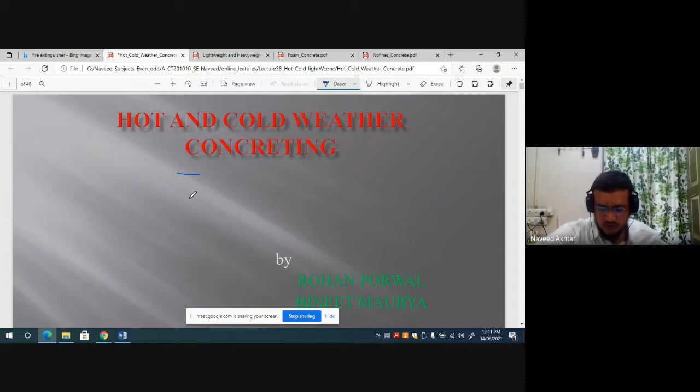Today we will see hot and cold weather concreting. Also lightweight concreting and its different types - foam concrete, no-fine concrete, etc. So we already finished our 4.5 units before the internal examination.

Now we will see the special types of concretes. In that we'll see the lightweight concrete, etc. So here, first of all, we will go through the hot and cold weather concreting.

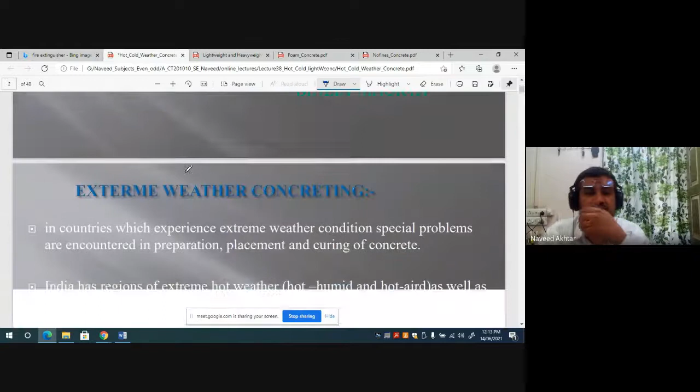Extreme weather concreting is too hot or too cold, when the temperature is beyond the exceeding limits, maybe in the colder region or in the hotter region. So these are called extreme weather conditions.

India has a region of extreme hot weather - hot humid and hot arid - as well as cold weather conditions. Different weather conditions are in India, you can see and experience. In Kashmir, the upper part of the Himalayan region, you will find colder regions sometimes, and Gujarat and below, the southern part, you can see hotter regions. They experience extreme weather conditions.

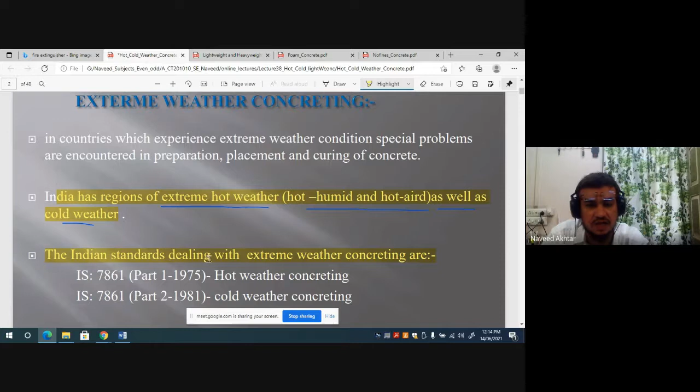IS 7861 Part 1, 1975 deals with hot weather concreting, and IS 7861 Part 2, 1981 deals with cold weather concreting. So there are two major extreme weather conditions - it may be hot weather concreting or it may be cold weather concreting.

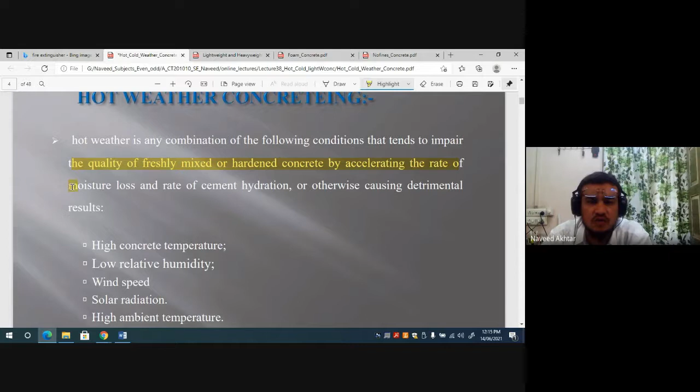In case of hot weather concreting, hot weather is any combination of the following conditions that tend to impair the quality of freshly mixed or hardened concrete by accelerating the rate of moisture loss and rate of cement hydration, or otherwise causing detrimental results. So definitely if the hot weather condition is there, then the moisture loss from the concrete is too high. High temperature is present in this region.

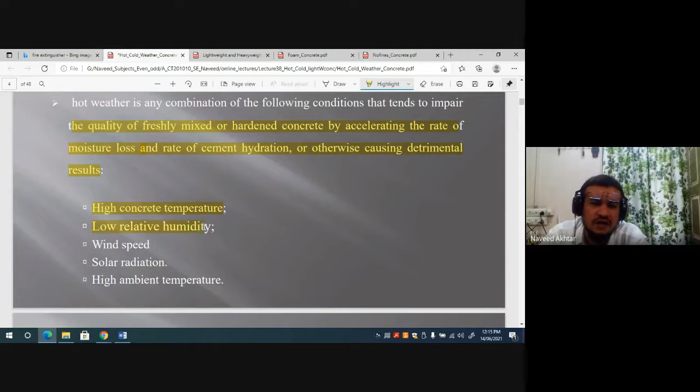Low relative humidity, wind speeds are also high. Solar radiation absorbs the moisture, and there is high ambient temperature. So what difficulty will you face in hot weather concrete? Because the loss of moisture from the concrete is very fast, we can feel increased water demand.

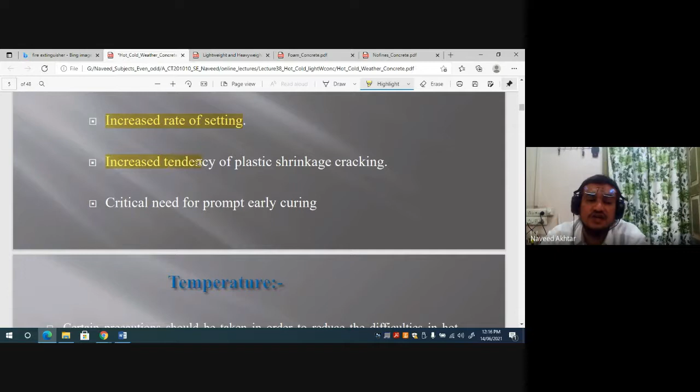Accelerated slump loss - slump loss will also be very high for you. Increased rate of setting - the rate of setting will increase, early set will happen for your mortar or concrete. Increased tendency of plastic shrinkage cracking due to the hot weather condition, and critical need for prompt curing.

So certain precautions should be taken in order to reduce the difficulty in hot weather conditions. Temperature ranging from 10 to 15 degrees Celsius is desirable, but such temperatures are not always practical. So many specifications require that the concrete should have a temperature of less than 29 to 32 degrees Celsius.

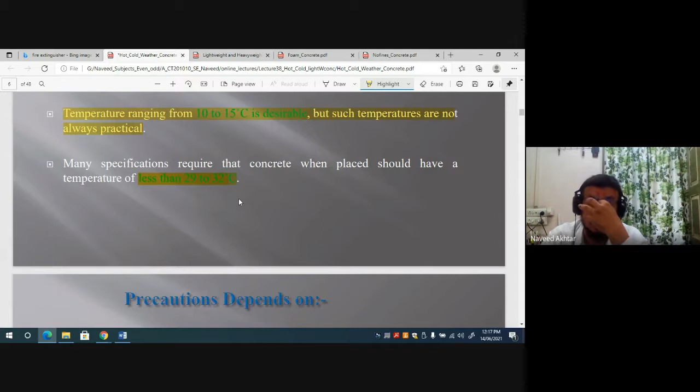So it is the condition where you have to place the concrete. When you are placing the concrete, the temperature outside or inside should not be more than 32 degrees Celsius. Otherwise, it will hamper the properties of concrete. So these come under hot weather concrete.

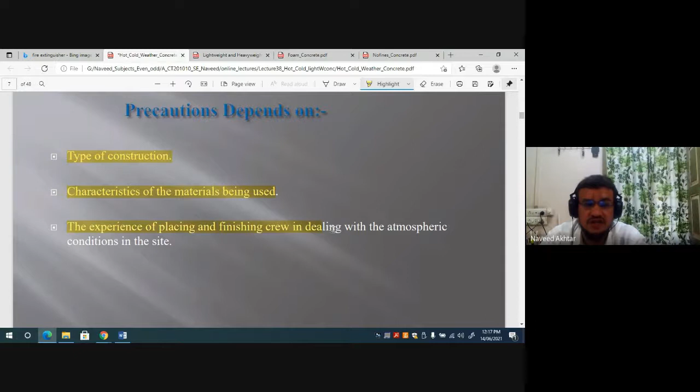Precautions depend on the types of construction you undertake, characteristics of the material being used, and the experience of the placing and finishing crew dealing with the adverse condition site. What precautions to use: the material mix proportion should have a good record in hot weather conditions.

Definitely you have to do mix proportioning specially in hot weather conditions, or maybe sometimes you have to use a retarder to reduce the setting time or delay the setting time in those conditions. Cool the concrete or one or more of its ingredients - I mean, use ice also. Sometimes ice is used.

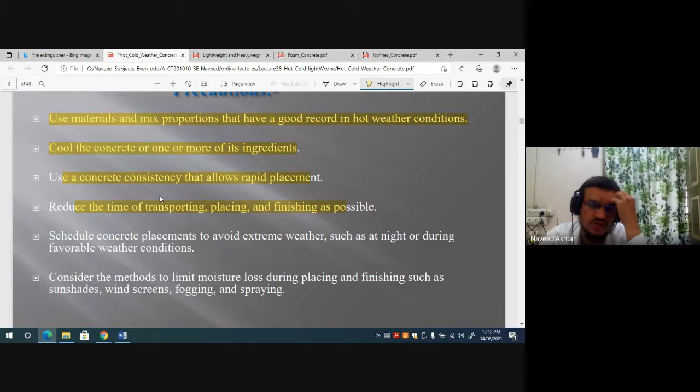Use a concrete consistency that allows rapid placement. Reduce the time of transportation, placing and finishing as much as possible. So the sooner you place the concrete, the sooner you vibrate and finish the concrete, that will be helpful.

Schedule concrete placement to avoid extreme weather, such as at night or during favorable weather conditions.

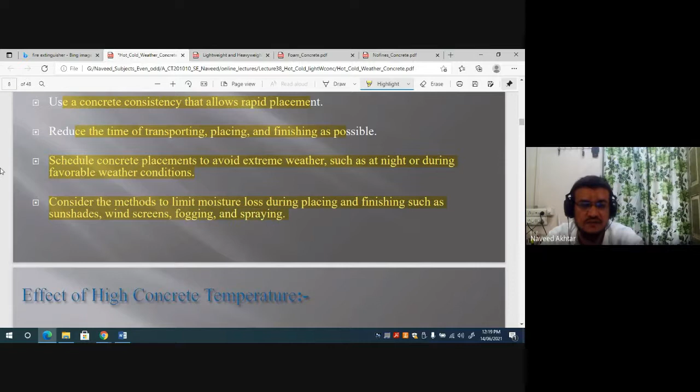अगर ऐसा हॉट रीजन है तो आप रात में कंक्रीटिंग करिए and consider the method of limiting moisture loss during the placing. Finish such as sunshades, wind screen, fogging, spraying. कंक्रीट जैसे खत्म होता है आप इसे polythene bag या other material से cover करेंगे so that it prevents dampness and moisture loss. फिर shed बनाइए, wind screening कीजिए या fogging कीजिए या spraying कीजिए over the surface to avoid the moisture loss from the concrete in hot weather concrete.

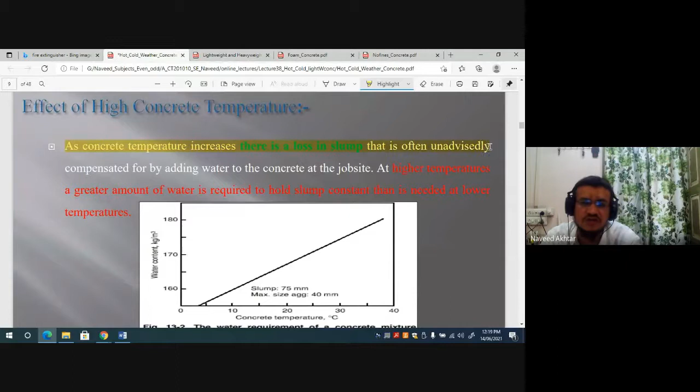So what is the effect of high temperature? As the concrete temperature increases, there is always loss in slump that is often unadvisedly compensated by adding water to concrete at the job site. लेकिन अगर हम ज़्यादा वाटर ऐड करेंगे तो वाटर सीमेंट रेशो बढ़ जाएगा and that will hamper the concrete strength.

So at higher temperature, greater amount of water is required to hold the slump constant, than is needed at lower temperature - lower temperature में वो नहीं चाहिए. तो आप देखिए कि water content आपके concrete slump 75 और maximum अगर 40mm रहे so that you can maintain and get the right values for the different temperature.

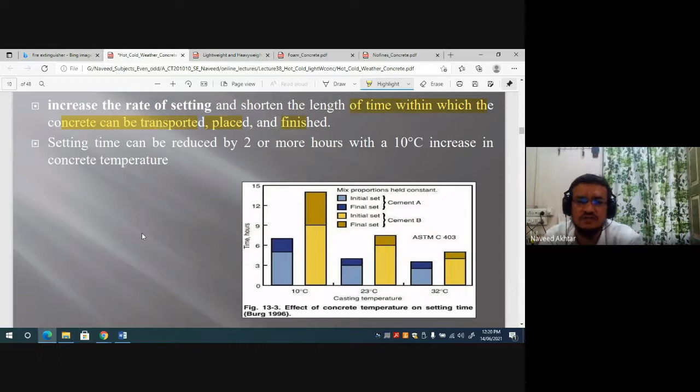Increase the rate of setting, shorten the length of time within which the concrete can be transported, placed and finished. टाइम को कम करना पड़ेगा, जल्दी फिनिश करना पड़ेगा, जल्दी प्लेस करना पड़ेगा, then only you will get the proper result.

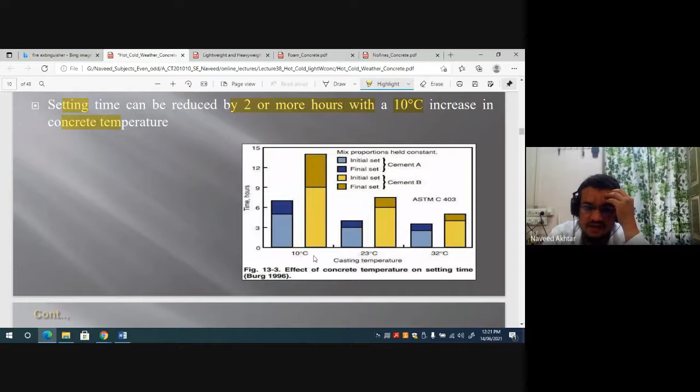Setting time can be reduced by 2 or more hours with 10 degrees Celsius increase in the concrete temperature. अगर 10 डिग्री आपका बढ़ता है कंक्रीट टेम्परेचर का तो सेटिंग टाइम आपको 2 घंटा रिड्यूस करना पड़ेगा. यहाँ पर एक ग्राफ आप देख रहे हैं 10 डिग्री सेल्सियस and the time in hours - the setting time will be reduced, you can see here.

You can see here, the setting time can be reduced. Final set, initial set, final set, initial set - these are at the different temperatures. The setting time is decreasing as the temperature increases. So that is the effect of concrete temperature on setting time in hot weather.

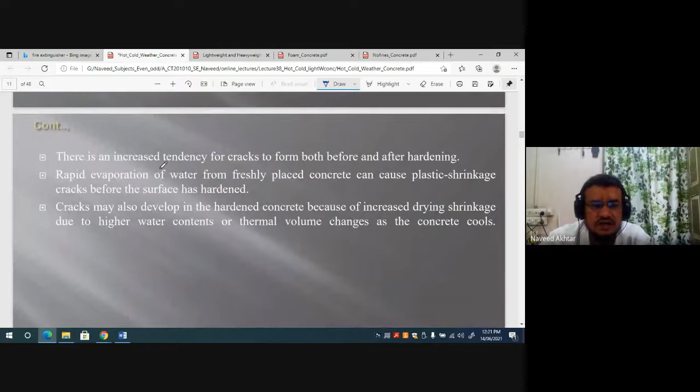There is an increased tendency of cracks to form. Rapid evaporation of water from freshly placed concrete can cause plastic shrinkage cracks before the surface has hardened. Cracks may also develop in the hardened concrete because of increased drying shrinkage due to higher water content or thermal volume changes.

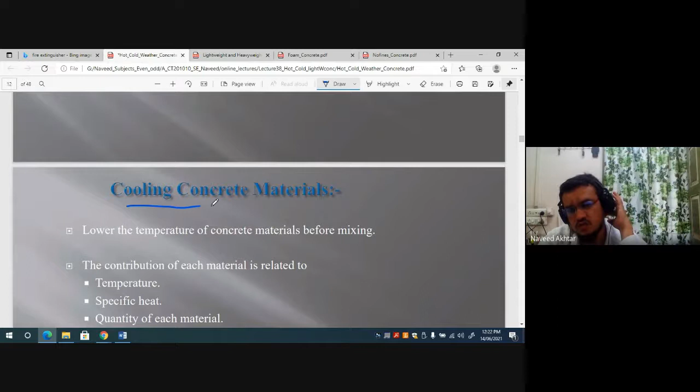Now, opposite to this is nothing but cooling concrete materials. So you can use this to avoid the increase of temperature or moisture loss - you can use cooling concrete materials. Lower the temperature of concrete material before mixing. The contribution of each material is related to the temperature, the specific heat, and the quantity of each material.

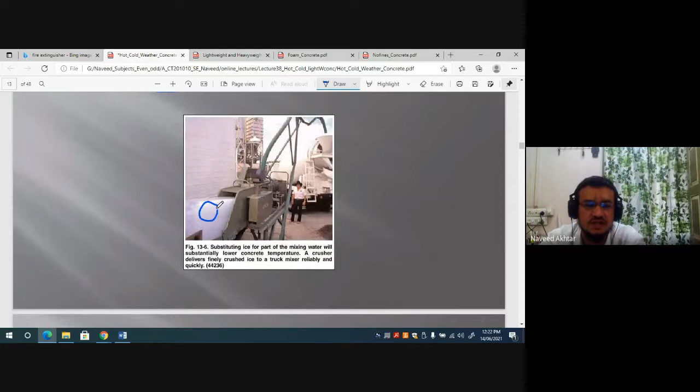जैसे कि मैंने बताया कि ice आप यूज़ कर सकते हैं, adding ice for substituting the water - water की जगह आप ice यूज़ करें कंक्रीट में, you can see your ice, you can introduce it and that can control the temperature. It is helpful for controlling purposes.

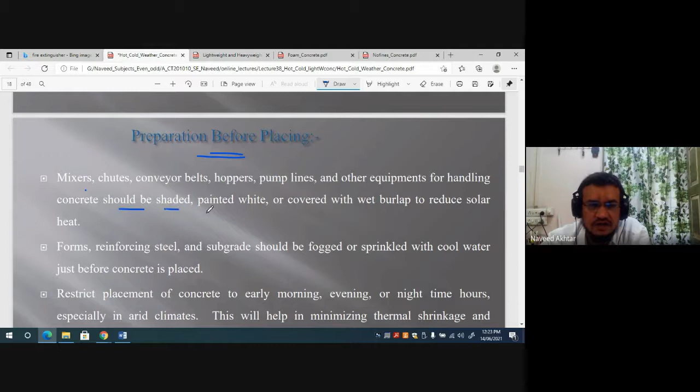Reduce the impact of the hot weather. And preparation before the placing - you should prepare before the placing: mixers, chutes, conveyor belts, hoppers, and pump lines. Other equipment for handling the concrete should be shaded, painted white, and covered with wet burlap to reduce the solar heat. Forms and reinforcing steel and subgrade should be fogged or sprinkled with cool water just before concreting is placed so that the temperature of the surfaces is restricted or maintained.

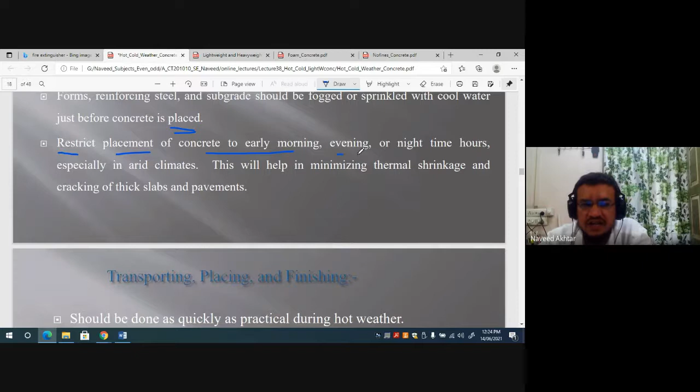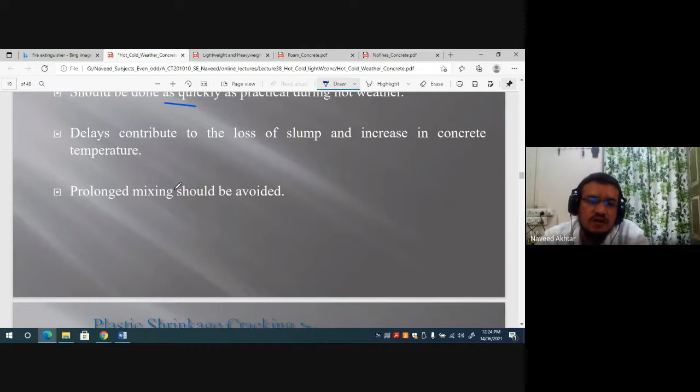Restrict the placement of concrete to early morning, evening or night time hours, especially in arid climates. This will help in minimizing the thermal shrinkage and cracking of thick slabs or pavement. Transporting, placing and finishing should be done as quickly as practicable during hot weather. Delay contributes to the loss of slump and increase in the concrete temperature. Prolonged mixing should be avoided.

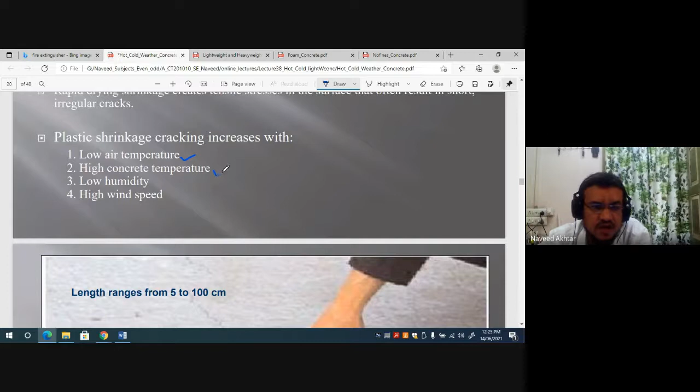Plastic shrinkage cracking in hot weather concreting. It can occur anytime ambient conditions produce rapid evaporation of moisture from the concrete surface, leading to surface cracks. These cracks occur when water evaporates from the surface faster than it can rise during the bleeding process, due to the more temperature.

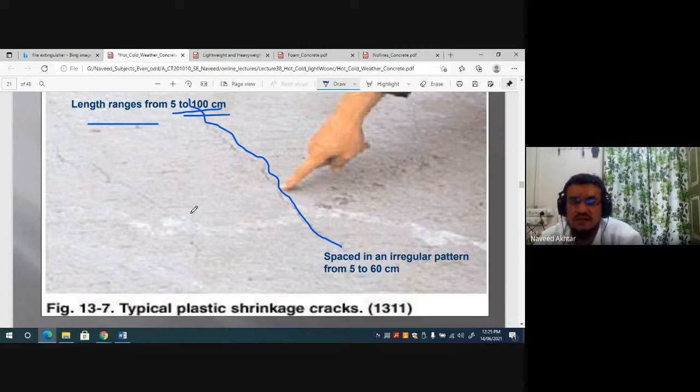Plastic shrinkage cracking increases with low air temperature, high concrete temperature, low humidity, and high wind speed. These cracks have a total length coverage from 5 to 100 centimeters, spaced along the surface in an irregular pattern, more than 5 centimeters apart, from 5 to 60 cm of these cracks. These are plastic shrinkage cracks.

Moist precautions to minimize plastic shrinkage cracks: moisten the concrete aggregate that is dry and absorbent beforehand so that its temperature is maintained. Keep the concrete temperature low by cooling the aggregate and mixing water.

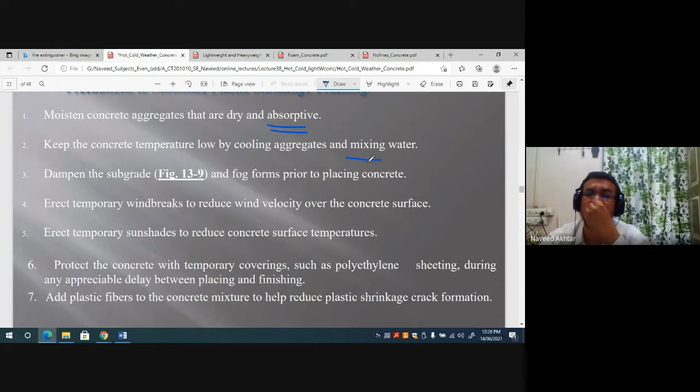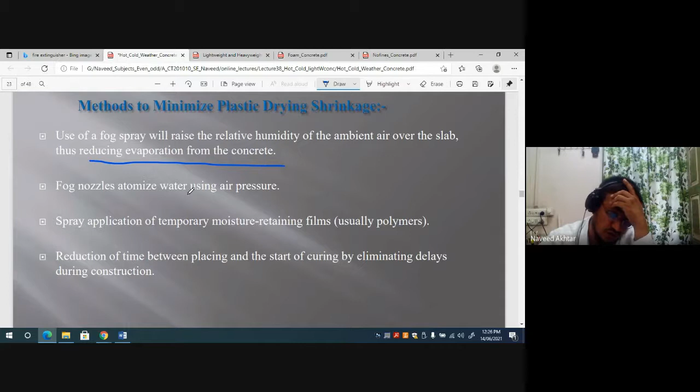Use of spray will raise the relative humidity of the ambient air over the slab, thus reducing evaporation from the concrete. Fog nozzles atomize the water using air pressure. Spray application of temporary moisture retaining films, usually polymers, and reducing the time between placing and the start of curing remains important during construction.

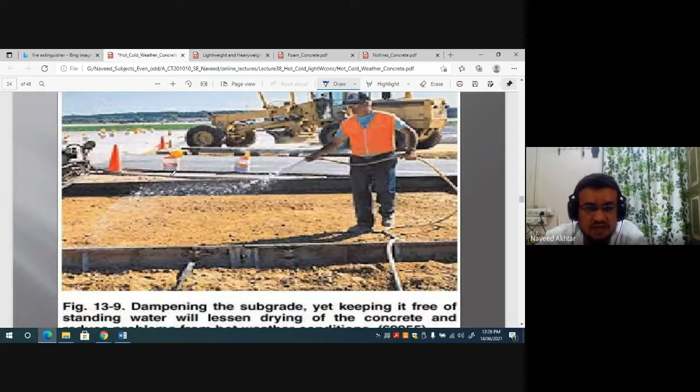So as soon as possible you should place the concrete. You can see the spraying of the subgrade when you are making the road in hot weather condition. These are the spray nozzles over the slab - this is called fogging. It cools the air and raises the relative humidity of the air.

Curing in hot weather condition is very important because the gain of concrete strength is a continuous process. The strength of concrete keeps increasing as days pass, up to 28 days. That's why curing of the concrete slab is most critical during the first few hours after finishing.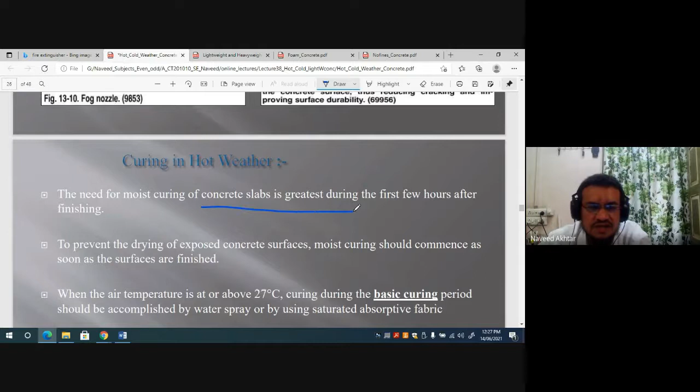To prevent drying of exposed concrete surfaces, moist curing should be commenced as soon as possible. As soon as your concrete is placed, you need to moisten the surface, and the sooner you start curing, the more it will avoid drying.

When the air temperature is above 27 degrees Celsius, curing during the basic curing period should be accomplished by water spray or by using saturated absorptive fabrics. Keep using such fabrics that keep your surface damp.

If your temperature is more than 27 degrees Celsius, it is very important. For mass concreting, curing should be done by water.

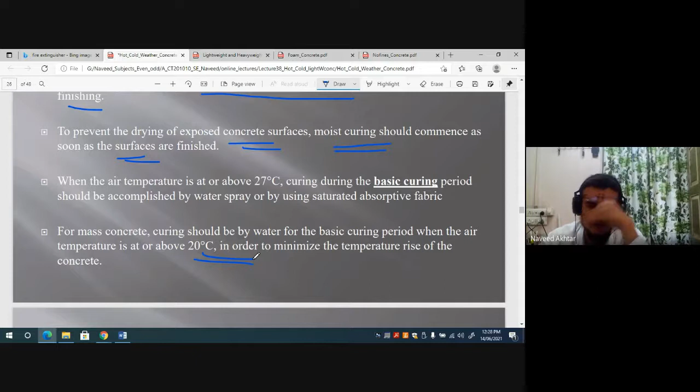For the basic period, when the temperature is above 20 degrees Celsius, in order to minimize the temperature rise of the concrete - the internal temperature of concrete also increases in case of mass concreting - care should be taken while curing the concrete.

You can use admixtures to delay the setting time despite the increased rate of slump loss resulting from their use. Hydration control admixtures can be used to stop cement hydration and setting at a single load.

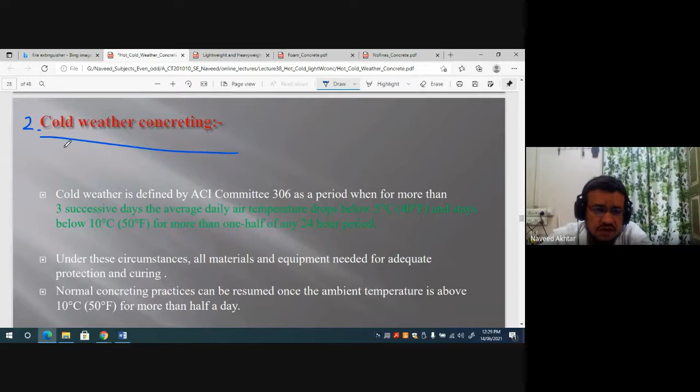The second technique is for cold weather concreting in colder regions. Cold weather is defined by the ACI committee as a period when three successive days have average daily air temperature drops of 5 degrees Celsius or below, or 10 degrees Celsius for more than one half of a 24-hour period. So if your temperature has dropped below 5 to 10 degrees Celsius, you can say there is cold weather condition in that region.

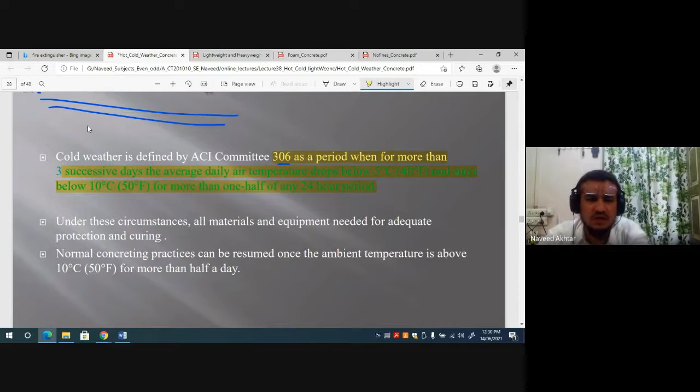Under these circumstances, all materials and equipment needed for adequate protection and curing must be arranged. Normal concreting practices can be resumed once the ambient temperature is above 10 degrees Celsius. But if it is below that, it will be treated as per the colder region guidelines that you can apply.

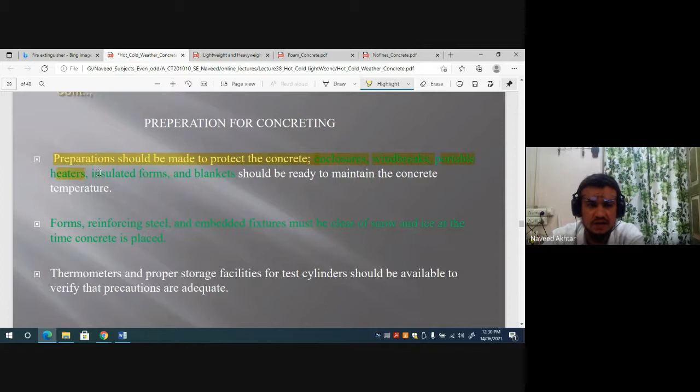Now preparation for concreting. Preparation should be made to protect the concrete by enclosure, wind breaks, portable heaters, insulated forms, and blankets should be ready to maintain the concrete temperature. Forms, reinforcement steel, embedded fixtures must be clear of snow and ice at the time of concreting period.

If there is ice and snow, you can avoid concreting. Screen that before you start the concreting work.

Thermometer and proper storage facility for the test cylinders should be available to verify the precautions are adequate for colder weather conditions. Effect of temperature on strength development of compression strength - you can see the age of test.

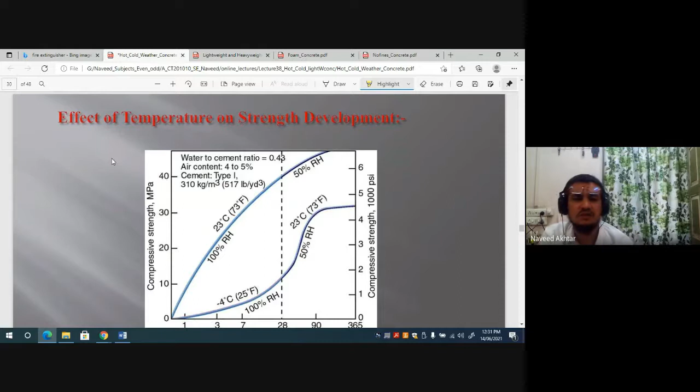You can see the water cement ratio is 0.43, but air content 4 to 5%, cement type 1, 310 kg per cubic meter. So you can see the compressive strength increases as the age of test increases.

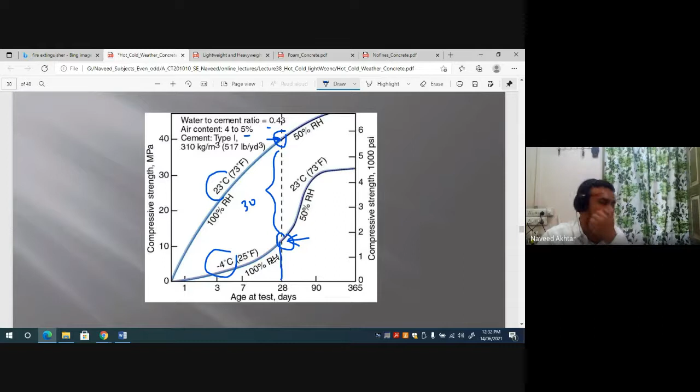But if the temperature is minus 4 degrees Celsius versus 23 degrees Celsius, you can see the reduced strength. The strength of concrete at 28 days is much lower here, only about 10 MPa. Same concrete at 23 degrees Celsius, the strength is around 40 MPa. So you can see a very large difference, around 30 MPa difference in 28 days strength, just because of the concreting condition in the colder region. So that is the problematic issue.

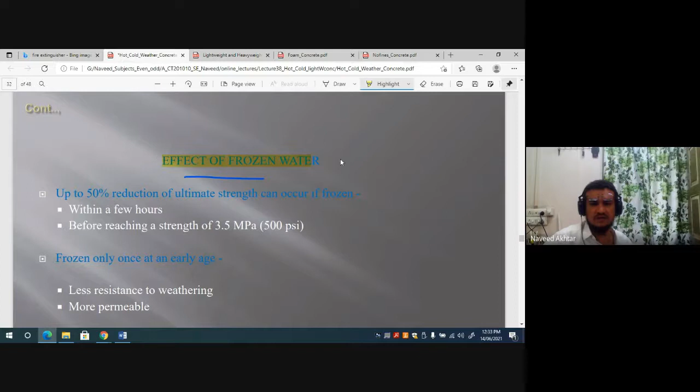Effect of frozen water - up to 50% reduction in the ultimate strength within a few days, a few hours before reaching the strength of 3.5 MPa.

Frozen only once at early age, less resistant to weathering condition, more permeable.

What is the thumb rule? For every 10 degrees Celsius reduction in concrete temperature, the time of setting of the concrete doubles. Thus it increases the amount of time that concrete is vulnerable to damage.

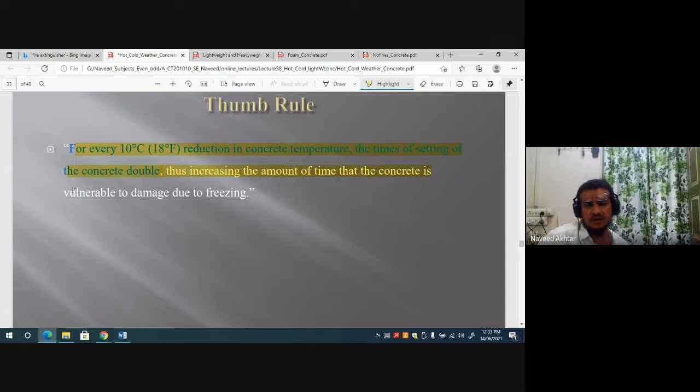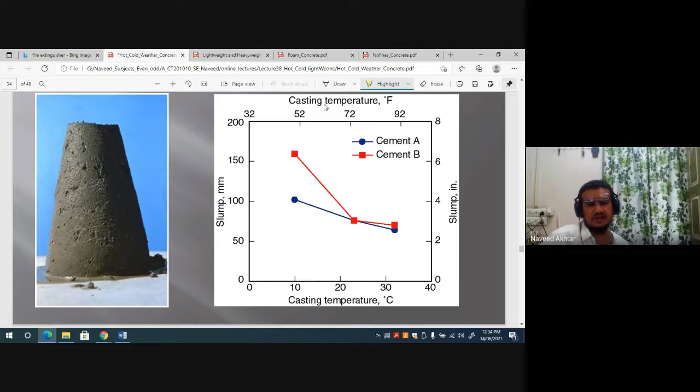The heat of hydration is useful in winter concreting as it contributes to the heat needed to provide a satisfactory curing temperature, often without external heat sources, particularly in more massive elements.

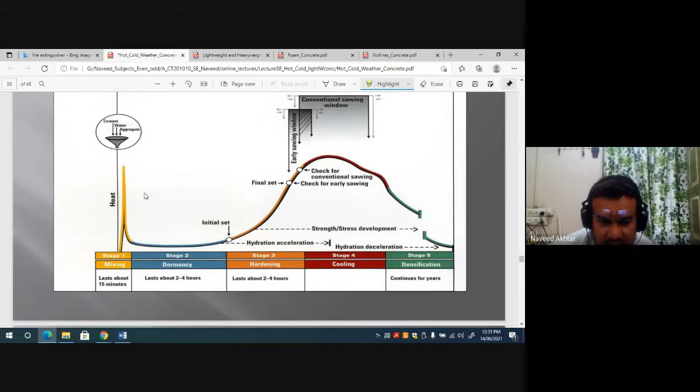Generally, in cold weather conditions, delay in the setting is observed. The hydration process is also slow, and there is an extended final set.

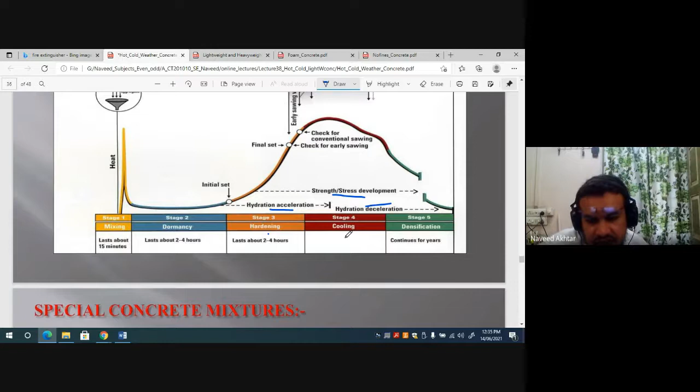So the strength development involves hydration acceleration and hydration deceleration processes due to mixing, dormancy, hardening, cooling period, and densification over years. You can see this graph, similar to when water is used for wetting - from that point, this graph develops.

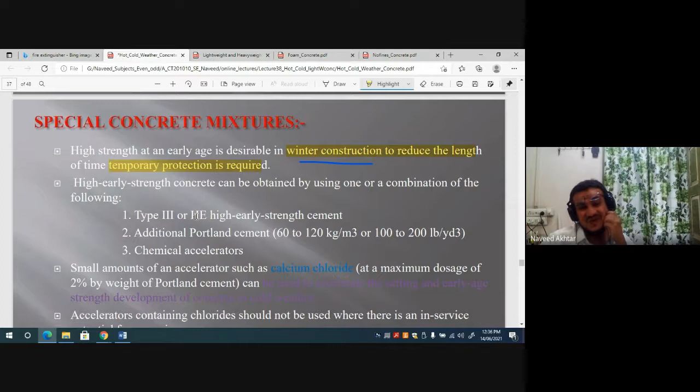Special concrete mixtures should be used. High strength at early age is desirable in winter conditions since it slows down the hydration process. So to boost or increase the hydration process, we need high strength at early age - the sooner the concrete gains strength at early age, that is very good and desirable.

Higher early strength concrete can be obtained by using one or more combinations - type 3 or HE cement, additional Portland cement can be used, and chemical accelerators can be used to accelerate the curing process.

Specially designed accelerating admixture for temperatures as low as minus 7 degrees Celsius can be used. A special design accelerating admixture you can use when the temperature is below -7 degrees or below 0 degrees.

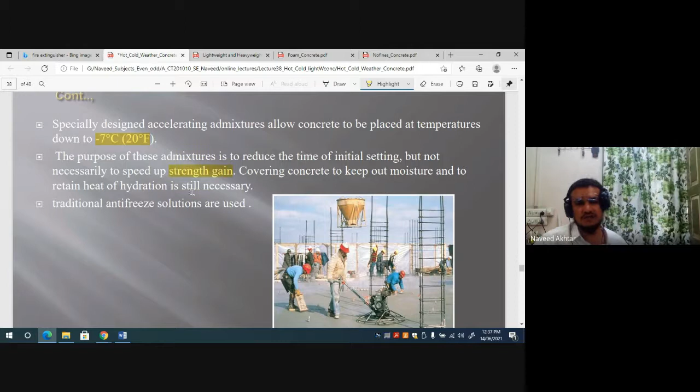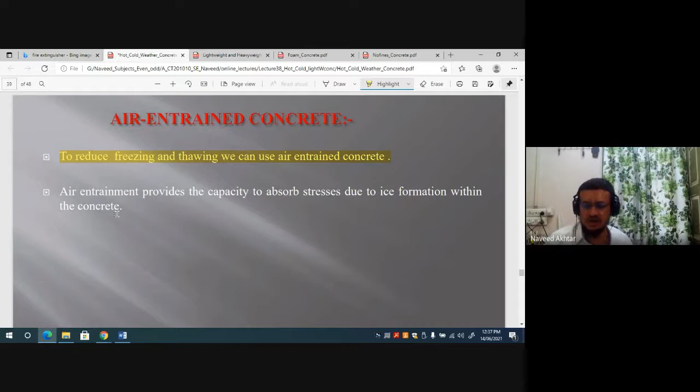When ice forms, that is when temperature is low, because the ice is expanding, if there is a void in the concrete then it has a very good effect and it will not develop a crack in the concrete due to the expansion of the water present inside. The ice will occupy the void and it will avoid the breakage or spalling of the concrete.

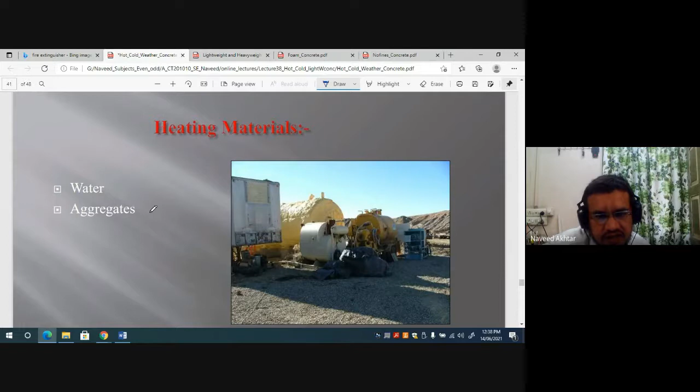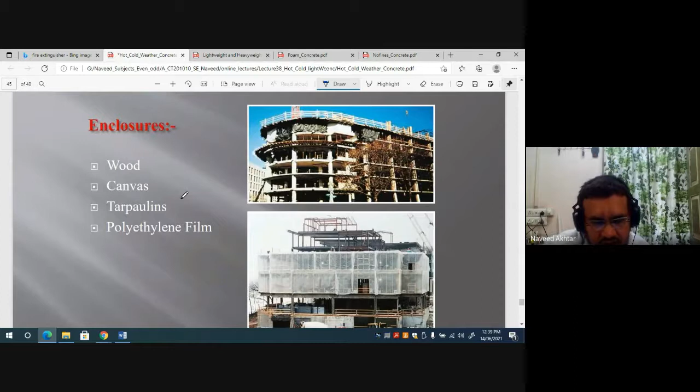To retain the heat of hydration, you can use blankets and cover the insulating blanket. You can cover the concrete with that, and that will avoid the loss of heat, along with a direct fire heater.

This is all about the concrete that is hot weather and cold weather condition, whatever concreting we are doing, that we discussed.

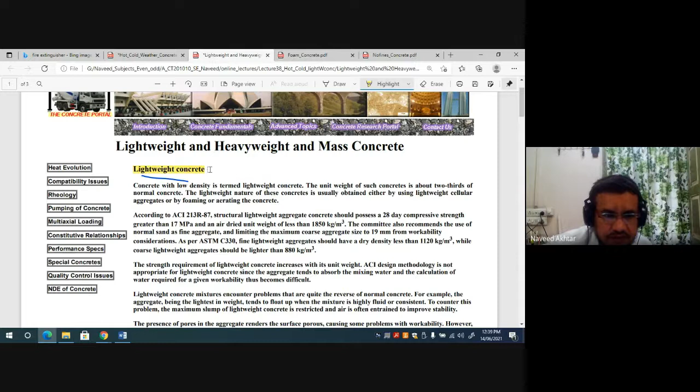Now the lightweight concrete. Why we need a lightweight concrete? So there is lightweight and heavyweight concrete and the mass concrete. You can see the lightweight concrete. Why do we go for the lightweight concrete? Because for the high weight, as per earlier description, the lightweight concrete helps to reduce the structural weight of the building or elements.

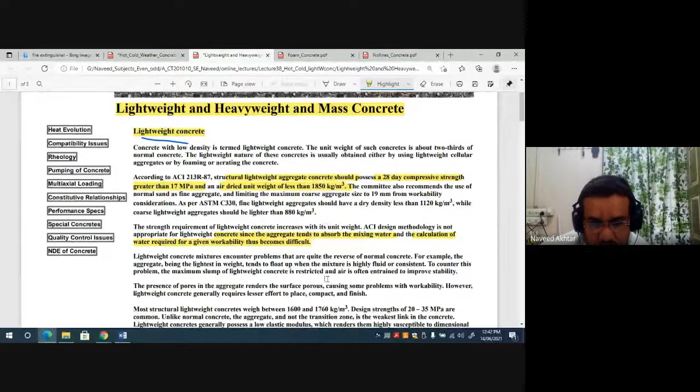Lightweight concrete mixtures encounter problems that are quite the reverse of normal concrete. For example, aggregate being lighter in weight tends to float up when the mixture is highly fluid or consistent. To counter this problem, the maximum slump of lightweight concrete is restricted, and air is often entrained to improve the stability.

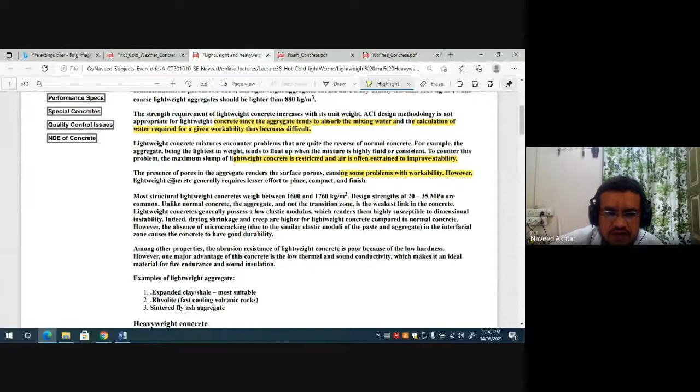So generally, in lightweight concrete, air is infused or foaming agents are infused to reduce the weight of the concrete and to improve the stability of the concrete. The presence of pores in the aggregate renders the surface porous, causing some problem with the workability. However, lightweight concrete generally requires lesser effort to place and compact.

Most structural lightweight concrete weighs between 1,600 kg per cubic meter to 1,760 kg per cubic meter, and the design strength of about 20 to 35 MPa is common, unlike the normal weight concrete aggregate.

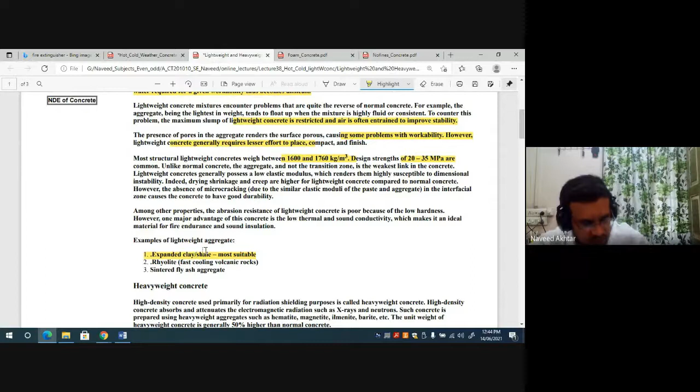There are different types of aggregate you can use for the lightweight concrete: expanded clay or shale is most suitable, or fast cooling volcanic rocks and sintered fly ash aggregate. These are the different types of aggregate you can use to make the lightweight concrete.

Similarly, the heavyweight concrete has a concrete density larger than the normal weight concrete.

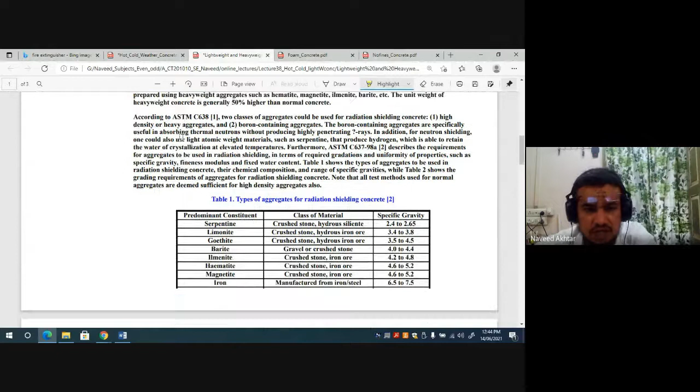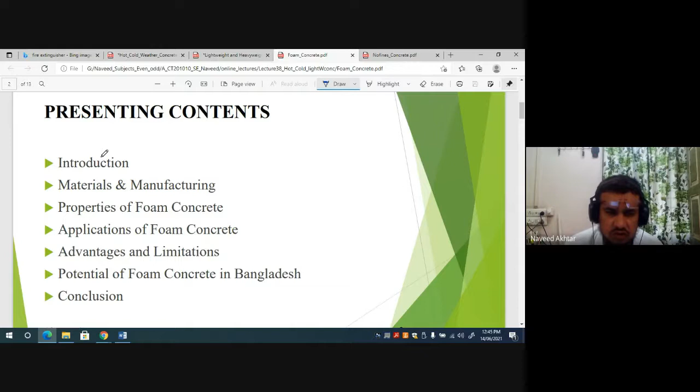Similarly, in lightweight concrete, another type is foam concrete, which is also available in our local market. Foam concrete is a popular and established material in construction nowadays, with lower self-weight, high workability, self-compacting properties, and thermal insulation.

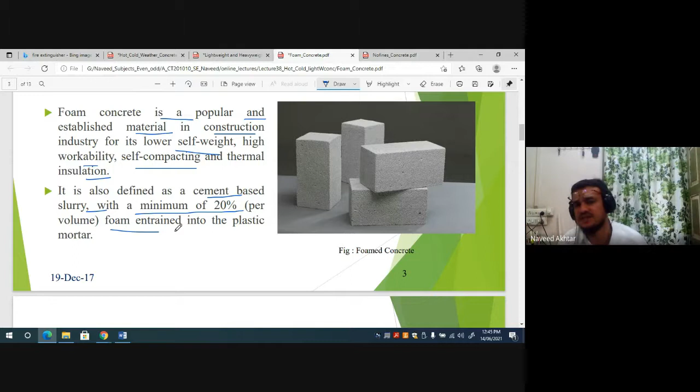It is defined as a cement-based slurry with a minimum of 20% by volume of foam or air-entraining agent integrated into the plastic mortar, which produces the foam concrete. Materials used include fly ash, binding materials like cement, admixture, and water.

These materials are used for foam concrete, generally for waterproofing purposes, for making a slope over the roof, and also to make lightweight blocks.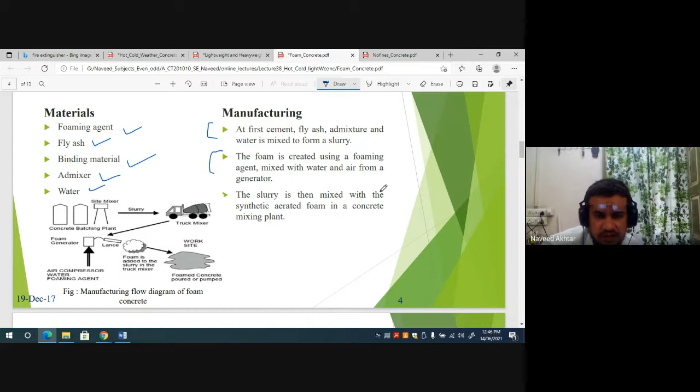First, cement, fly ash, admixture, and water are mixed to form a slurry. The foam is created using a foaming agent, mixed with water and air from a generator. The slurry is then mixed with the synthetic aerated foam in the concrete mixing plant. This is the overall manufacturing plant layout and flow diagram for producing foam concrete.

What are the properties? The compressive and tensile strength increases with the casting density, along with thermal conductivity. Foam concrete is popular for its low thermal conductivity, with low heat transfer, so it may be used for insulation in hot weather conditions.

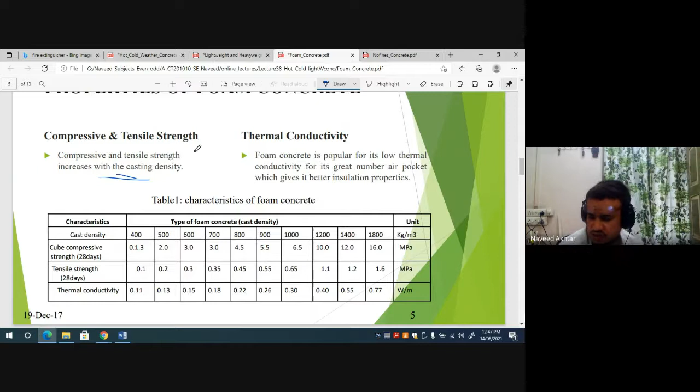You can see the characteristic strength and cast density relationship. As the density increases, the strength also increases. As density increases, the strength at 28 days also increases, and the thermal conductivity also increases with density.

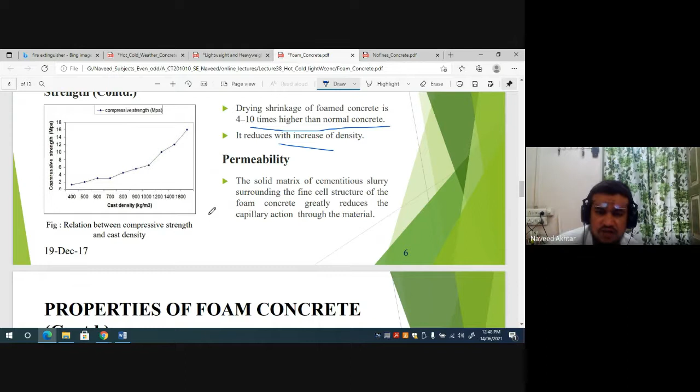The drying shrinkage of foam concrete is 4 to 10 times higher than normal concrete, but it reduces with increase in density. The solid matrix of cementitious slurry surrounding the fine cell structure of foam concrete greatly reduces capillary action, making it somewhat impermeable.

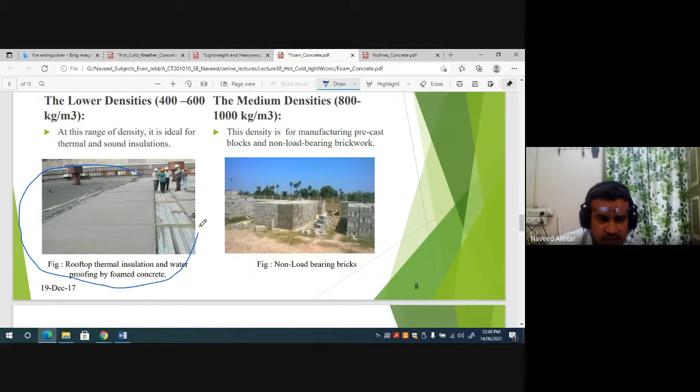That's why it can be used for rooftop thermal insulation. You can see here foam concrete being used for rooftop thermal insulation. Also, non-load bearing blocks are made, with this density for manufacturing precast blocks and non-load bearing brick walls used.

In a load bearing system, the load from the slab or beam is transferred through the walls. But in case of framed structure, you can use this infill material as a block in place of brick, because they are only for insulation or partition purposes. If you are passing load through the wall, then these blocks are not recommended.

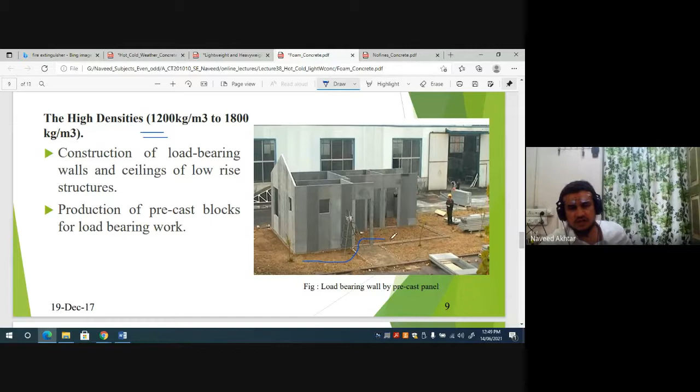The highest density load bearing wall series can be seen here. This house is developed using different concrete types.

Advantages and limitations: it does not settle and requires no compaction. Foam concrete does not need vibration or compaction, it is self-compacting, very lightweight, and does not impose large loading. It is a rapid and relatively simple construction material with no hazard while using it.

Greater care is required to control the water content in the mixing, which is a limitation. A special measure of pumping concrete is required. The mixing time is much longer than conventional concrete, and it has more brittle surfaces.

Another technique for lightweight concrete is called no fine concrete. The term itself says that in this concrete, only coarse aggregate is there. No fines means fine aggregates are not used. This concrete is also called pervious concrete.

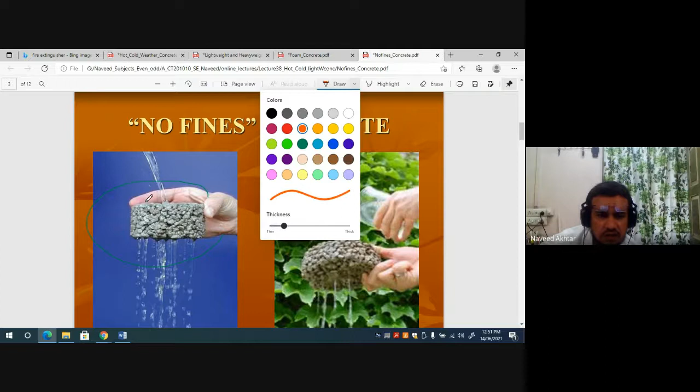You can see the water passing through the surface, the flow of water here, and then it is pervious concrete, and the water is discharging from the below. Here also we can see the example. So this is the pervious concrete, no fines.

There is no fine aggregate used. It is a special type of gap graded concrete, also known as pervious concrete. It is made by eliminating the utilization of fine aggregate in concrete.

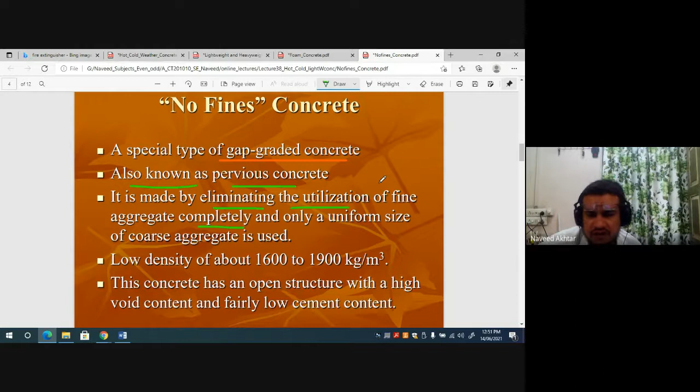So no fines are used. Fine aggregate are totally not used in no fine aggregate concrete. Low density about 1600 to 1900 kg per cubic meter, so it is also lighter than normal weight concrete.

This concrete has open structure with high voids content and fairly low cement content. So very high voids are there, so it is also called, due to high voids, pervious concrete. No fines concrete is also called pervious concrete.

It's a concrete with a high volume of voids, 20 percent to 35%, high permeability that allows water to flow through it easily. Since it is very porous and highly permeable to air and water, it cannot be used for foundation.

If the coarse aggregate used is a lightweight aggregate rather than stone, the concrete would have an excellent property, and ultra high lightweight material can be used.

Then how to make the no fine concrete? The paste content should be just sufficient to slowly coat each aggregate particle.

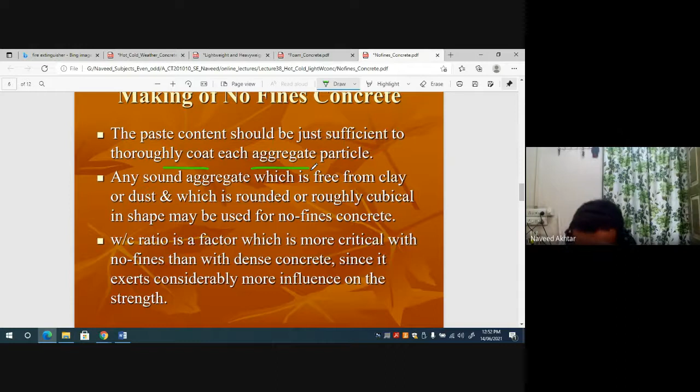Any sound aggregate which is free from clay dust, which is rounded or roughly cubical in shape, may be used for the no fines concrete.

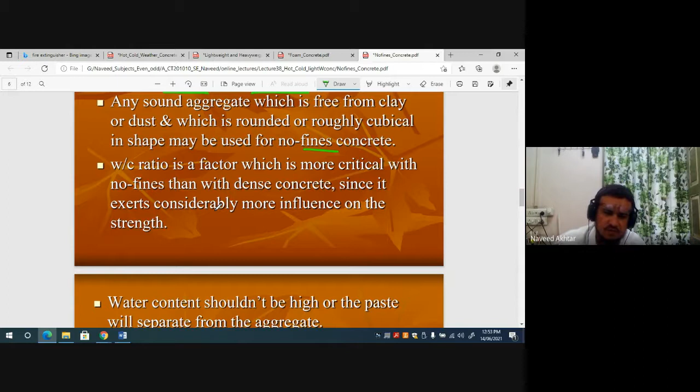Water to cement ratio is a factor which is more critical with the no fines than dense concrete, since it exerts considerably more influence on the strength. Water content shouldn't be high or the paste will separate from the aggregate. The water content should be very low in the no fines concrete.

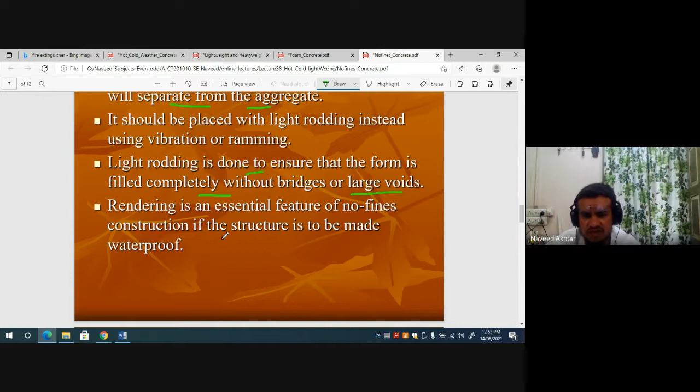Light rodding is done to ensure that the form is completely filled without bridges, large or over a large void. Rendering is an essential feature of no fines construction. The structure is to be made waterproof.

Advantages: the low hydrostatic pressure of this material, so it may be suggested for pavers. Better insulation characteristics than conventional concrete due to the air available in the wide voids.

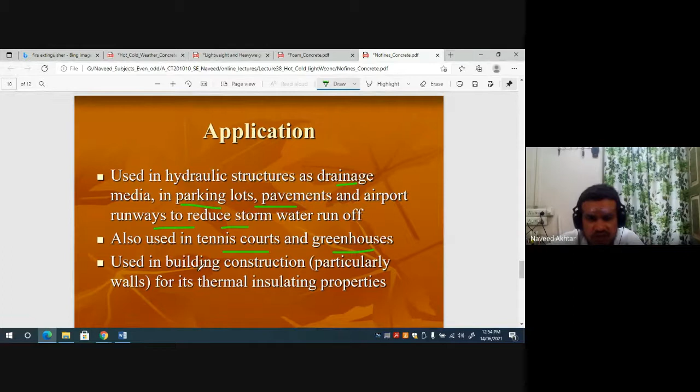No segregation, capillary movement of water has low drying shrinkage properties. Its application is used in hydraulic structures such as drainage media, parking lots, pavements, airport runways to reduce storm water runoff. It is also used in tennis courts and greenhouses, and in building construction, particularly for thermal insulation.

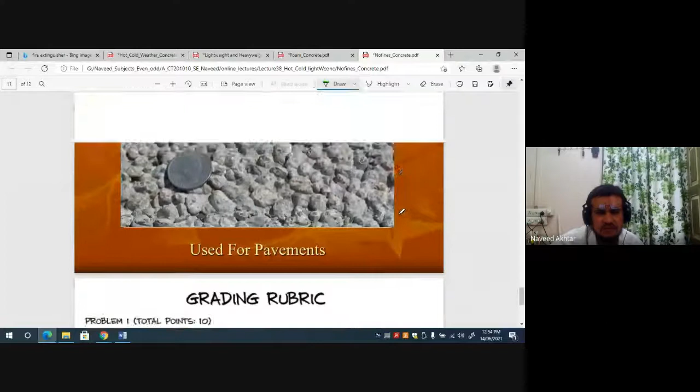So this is what about today's lecture. Today's lecture is about concrete techniques in cold and hot weather concreting, also using lightweight concrete, and its different types, that is foam concrete and no fine concrete. Tomorrow, inshallah, we will see other special types of concrete techniques.